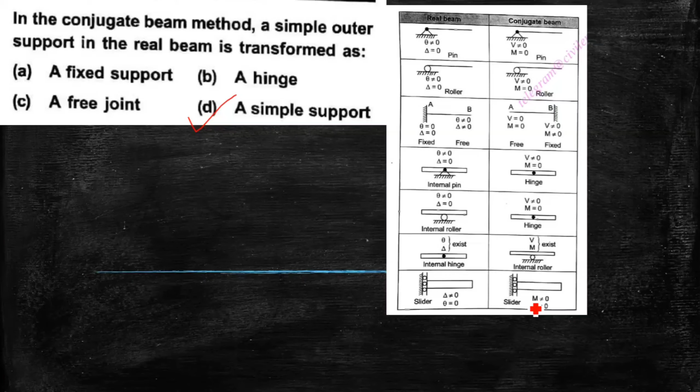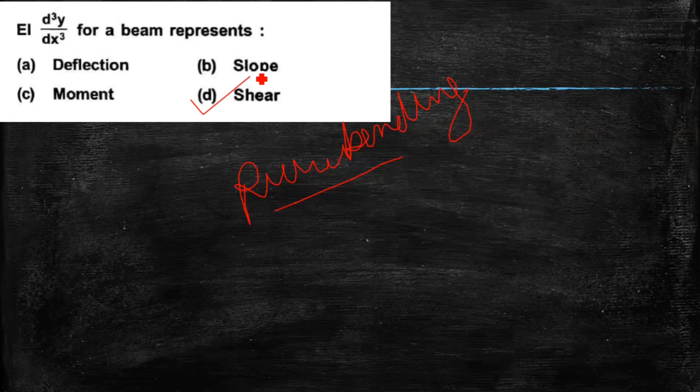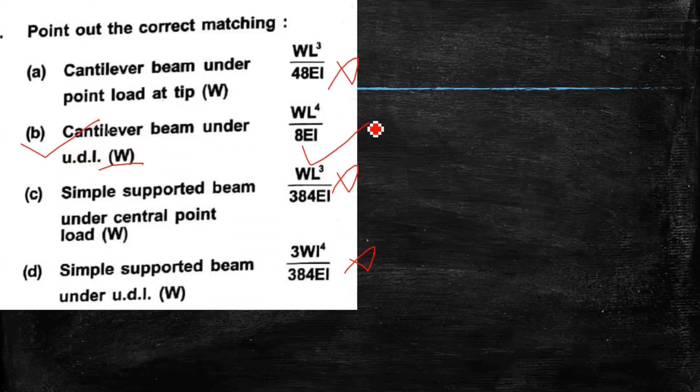So moving to the next question, we have a concentrated load W acts at the center of the simply supported beam of length L. If the load is changed to uniformly distributed load over the entire span, the ratio of the maximum deflection under the concentrated load and under the uniformly distributed load is. So in case of simply supported beam, the central deflection is WL cube by 48 EI. Whereas in the case of UDL, the central deflection is 5WL to the power 4 by 384 EI.

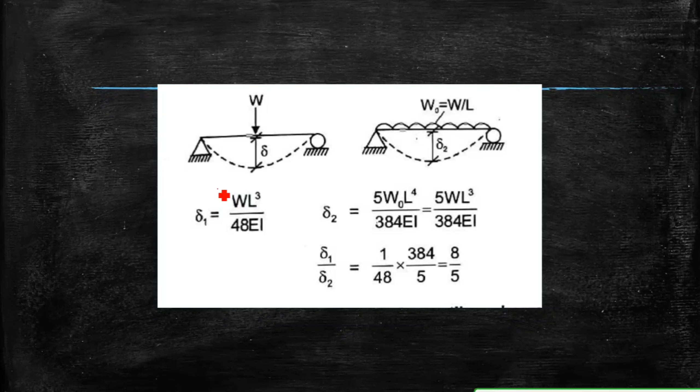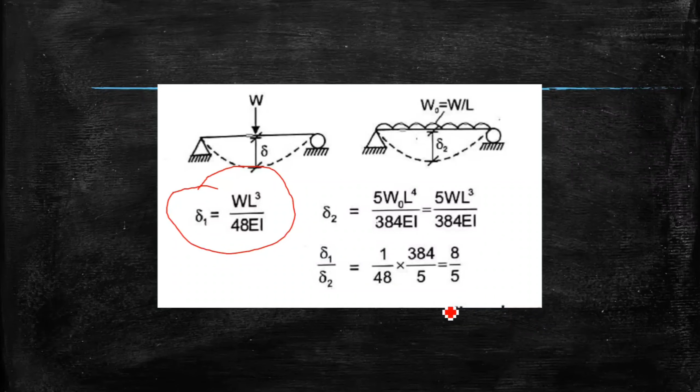So here we can see for simply supported beam we have WL cube by 48 EI, whereas for UDL we have 5WL to the power 4 by 384 EI, where W naught is the UDL, which can be converted into the standard load equivalent of simply supported point load, which would be 5WL cube by 384 EI. Taking the ratio, we have the answer 8 by 5. So the correct answer is option D, that is 8 by 5.

Moving to the next question, we have deflection of the free end of a cantilever beam having a concentrated load W at the midspan is. So this is a very good question. So here we have point load W acting at the midspan of a cantilever beam. So we'll have the two deflections, delta 1 and delta 2. For L by 2, the deflection from the standard result is WL cube by 3 EI, with L by 2 for this portion, half of the beam. So WL cube by 3 EI gives us WL cube by 24 EI.

For the second portion, from this triangle, we can take tan theta, which is perpendicular by base, to get delta 2. Since the angle is very small, we can consider tan theta equal to theta c. For a point load on a cantilever, the slope is WL square by 2EI, so we get WL square by 8 EI. And for delta 2, tan theta is equal to delta 2 by base, so delta will be theta multiplied by this length. So delta 2 is theta c multiplied by L by 2, which gives us WL cube by 16 EI.

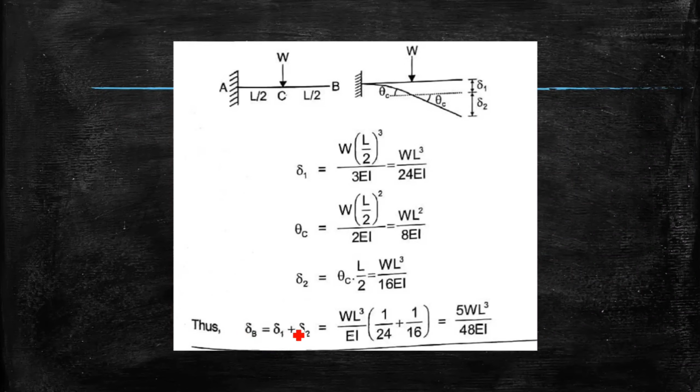So the total deflection is delta 1 plus delta 2. So the final result is 5WL cube by 48 EI. So the correct option is option C, 5WL cube by 48 EI.

So moving to the next question, we have the maximum deflection of a simply supported beam of effective span L and subjected to a central load W is given by. Options given are option A WL cube by 8 EI, option B WL cube by 24 EI, option C WL cube by 48 EI, and option D 5WL cube by 384 EI. Simply supported beam for a central load W, the correct answer is option C, WL cube by

48 EI. Whereas in case of UDL, the correct answer will be option D. That is, sorry, it will be 5WL to the power 4 in case W is UDL. Whereas if it is converted into the equivalent point load, then it will be 5WL cube by 384 EI.

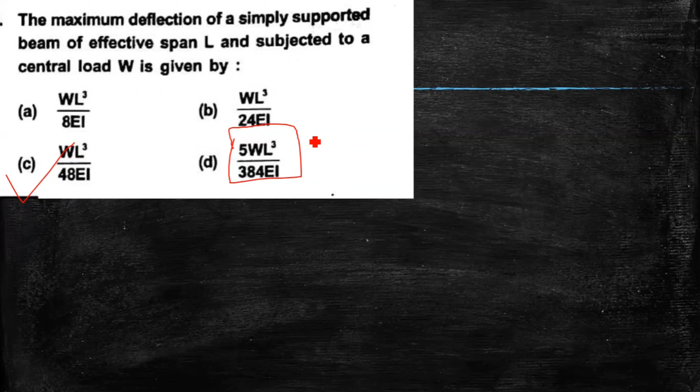So moving to the next question, we have a cantilever beam as shown in the figure. Find the magnitude and direction of the moment to be applied at the free end for zero vertical deflection. Let's see the solution first. For a point load, the deflection due to the 9 kilonewton load will be WL cube by 3 EI. So we have 24 by EI downwards, whereas for a moment it will be ML square by 2 EI.

So this must be 0. That means the deflection due to the moment must be equal to the deflection due to the point load. So equating both the equations, we get M is equal to 12 kilonewton. So the correct answer is 12 kilonewton meter clockwise.

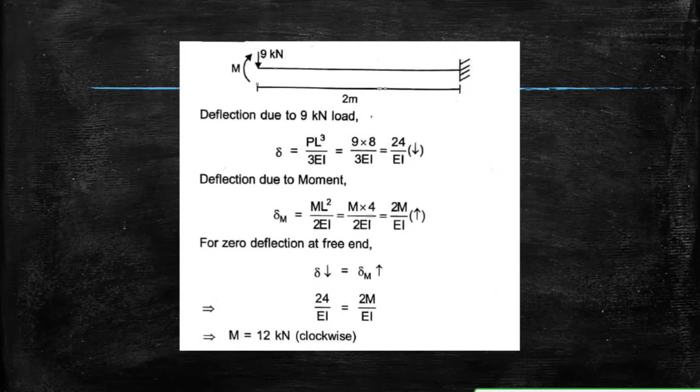Moving to the next question, we have a rolled steel joist simply supported at its ends and carrying a uniformly distributed load which causes a maximum deflection of 10 mm and slope at the ends of 0.002 radian. The length of the joist will be option A 10 meter, option B 12 meter, option C 14 meter, option D 16 meter. So let's see the solution.

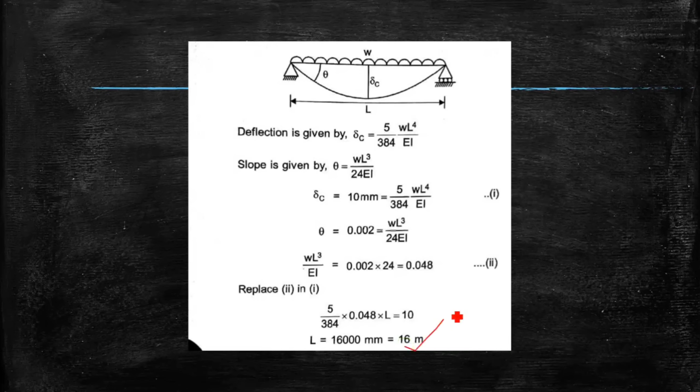For a UDL, we know deflection is given by 5 WL to the power 4 by 384 EI, where W is the UDL, and slope is given by WL cube by 24 EI. So we have the deflection and the slope, so we can replace WL cube by 24 EI. Replacing, we get L is equal to 16 meter. So the correct answer is option D, that is 16 meter.

Moving to the next question, the ratio of the deflection at the free end of a cantilever due to an isolated load at 1/3 and 2/3 of the span is option A 1 by 7, option B 2 by 7, option C 3 by 7, option D 2 by 5.

If the load P is acting at 1/3 of the beam, for the deflection at the free end we can again divide it into two parts, delta 1 and delta 2. For delta 1 it will be PL cube by 3 EI, and for delta 2, from this triangle we can take tan theta, and this will be the slope multiplied by this length. So for delta 2 the slope is PL square by 2 EI, into this length.

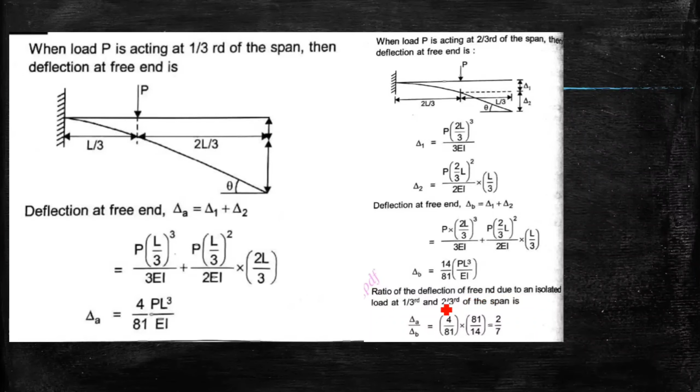So we get delta 2, and the question has asked the ratio of the deflections. So delta A divided by delta B, we get the answer 2 by 7. So the correct answer is option B, that is 2 by 7.

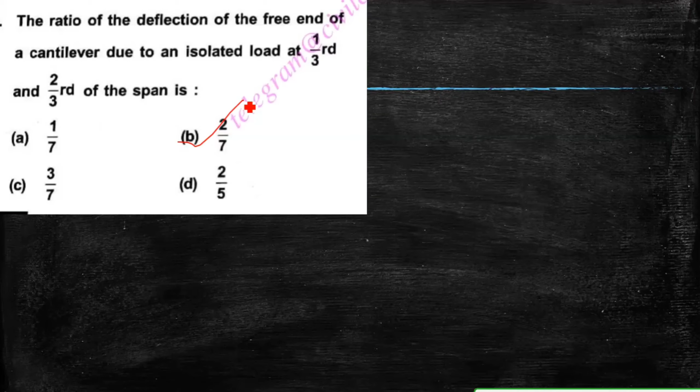Moving to the next question, the deflection of a uniform circular bar of diameter d and length L, which extends by an amount e under a tensile pull W, when it carries the same load at its midspan is? When a bar is simply supported, we know the deflection is given by WL cube by 48 EI, and since the section is given, we can find out I. For a circular section it is pi d to the power 4 by 64.

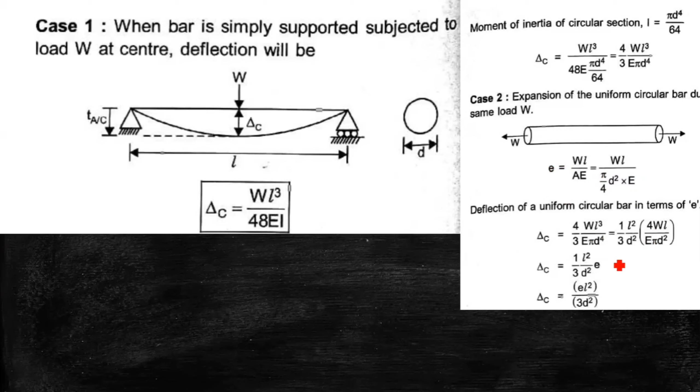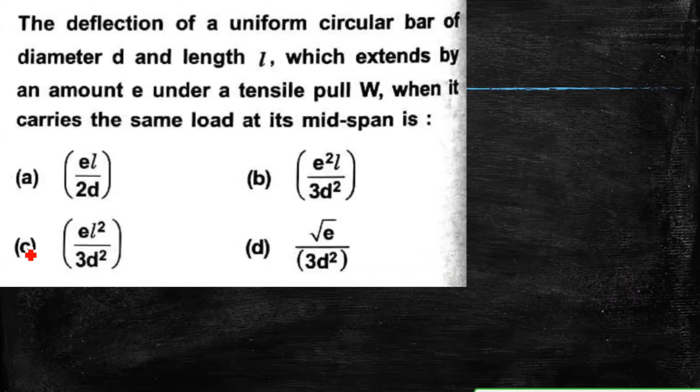The extension of a uniform circular bar due to the same load W is the standard result WL by AE, where the area is the circular area, pi by 4 into d square, whereas I is replaced by pi d to the power 4 by 64. So we substitute this value as e in this equation, separate out and replace this term by e, and we get the answer eL square by 3d square. So the correct answer is option C, that is eL square by 3d square.

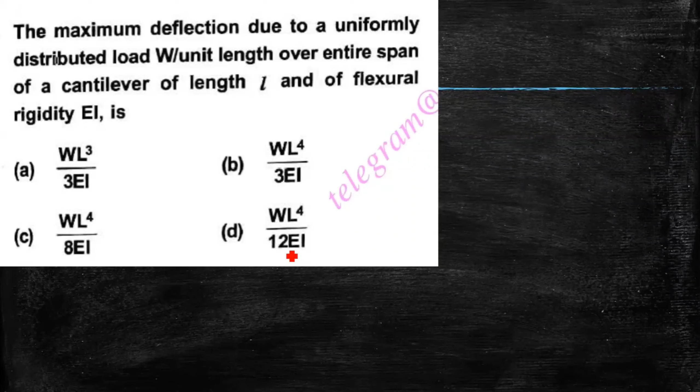Moving to the next question, the maximum deflection due to a uniformly distributed load W per unit length over the entire span of a cantilever of length L and flexural rigidity EI is option A WL cube by 3 EI, option B WL to the power 4 by 3 EI, option C WL to the power 4 by 8 EI, option D WL to the power 4 by 12 EI. The correct answer is option C, that is WL to the power 4 by 8 EI.